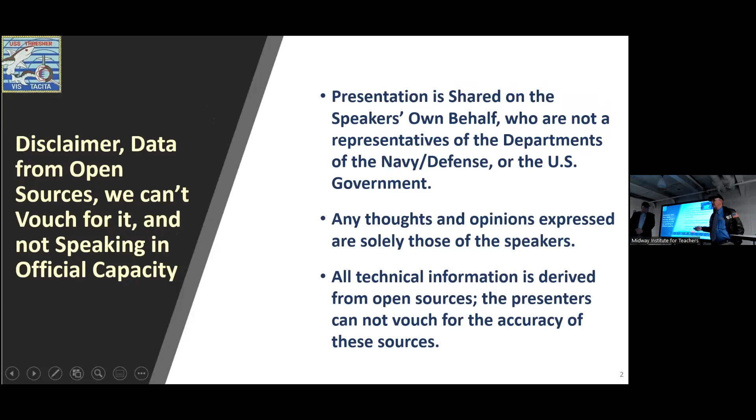We use standard criteria, we're not the government, some of the terms qualified people under submarines would use. ASW means 2 things: it can mean auxiliary seawater system, or it can mean anti-submarine warfare. Ship service motor generator is important.

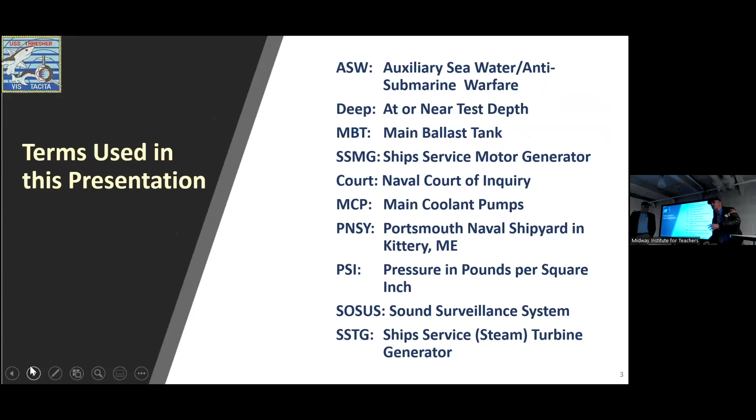It's rotating machinery, battery to AC power. And then down here, you've got a ship service turbine generator. The ship service motor generator runs main coolant pumps. They remove all the hot stuff out of the reactor core, move it into the steam generators so it can create steam. It was a very exciting class because it was quiet, it was fast.

It could go on a routine test. This is not a special test or anything.

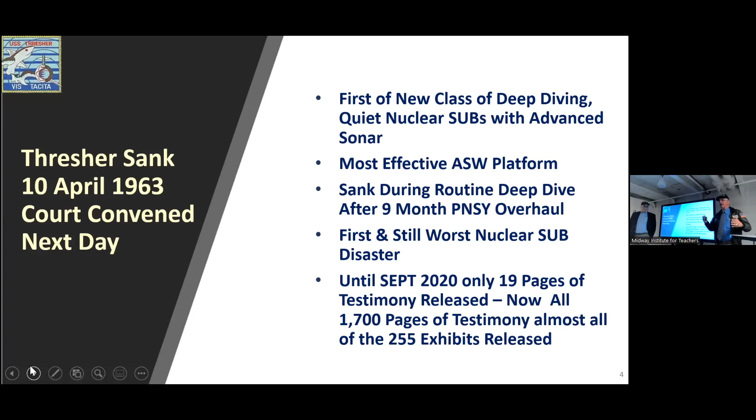It's not operational, it's a routine test dive to test the hull after an overhaul. Until I got involved, only 19 pages of testimony had been released. After getting stonewalled by the Navy, I finally decided to sue them. Now we've got maybe about 3,000 pages of information. I think the Navy did not give me whole blank pages of redaction. The group here can understand it because we're submariners, but folks who don't know submarines would not be able to understand it.

So I will definitely be challenging the redactions. No cover-ups, no smoking guns. And here's the key formula, right here: no one realized the danger of going almost doubling the test depth of the submarine.

And all of these things, procedures, mindset, all of that, no concept of what the real danger was. Also, the deep dive test was just not done right, it was very unsafe. Admiral Rickover, Director of Naval Propulsion, had a procedure that could have saved Thresher using emergency propulsion, and that was not approved for Thresher. Steve will talk a lot about crew training and officer experience.

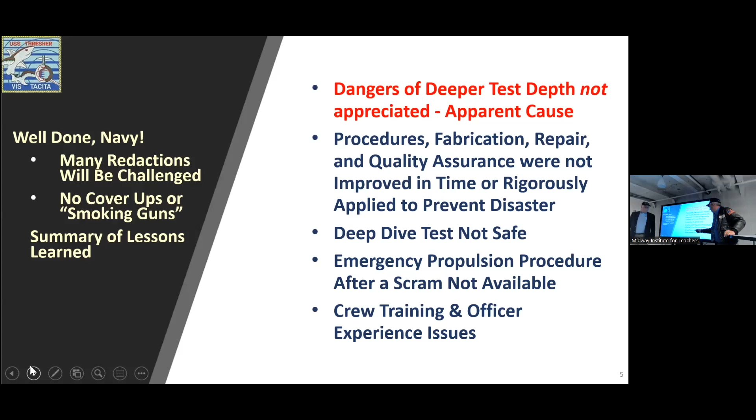Now everything below 800 feet operating is classified. Even Chopper, which we all know went to 1,000 feet, is in open literature. But if you show that to the Navy, they'll say that's classified. I mean, Thresher-class boats were gone a long time ago.

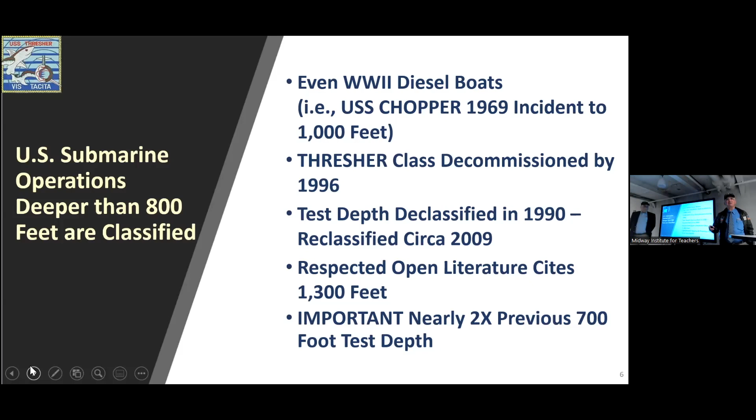In 1990, they declassified and released a book stating the test depth of Thresher as 1,300 feet. But they reclassified that again in 2009. Not sure what it is now, but respected literature, which we quote, not our own knowledge, says 1,300 feet. That's important because that's almost twice the test depth of previous submarines, which went from 700 feet to 1,300 feet.

This is a timeline, and like I was saying to a gentleman at lunch, you've got to take it in the context of Sputnik. The Soviet Union had put Sputnik into orbit. In the United States as a country, obviously DOD, Capitol Hill, everybody else, there was a lot of angst. So around the time that the ship's keel was laid and she was designed, you had a satellite orbiting.

3 years and 3 months later, she was commissioned, phenomenally fast. A year after that, she did explosive shock testing. A lot of you folks have heard about shock trials on the aircraft carrier Ford. That's a requirement for all new classes of ship.

After that, in 1962, she entered the shipyard where she was built for a post-shakedown availability. During that time frame, both the CO and the XO were transferred from the boat, and 3 months later, she commenced sea trials and was subsequently lost.

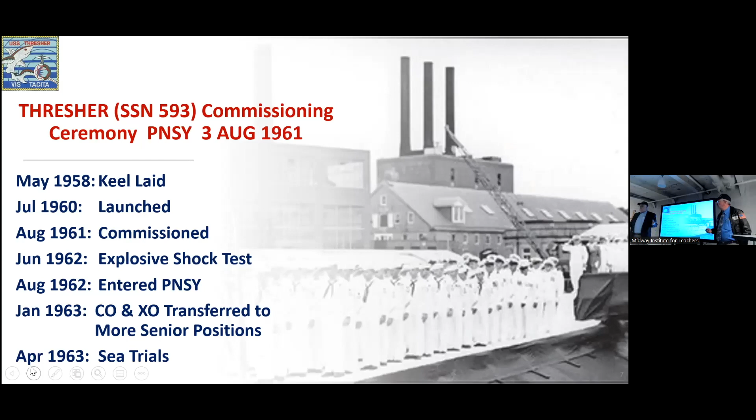Another thing to bear in mind, and keep this in the back of your mind, 6 months before Thresher was lost, we had the Cuban Missile Crisis. Many of us lived through that.

Okay, test depth, collapse depth, very important to understand. Test depth is the maximum submarine operating depth. It can go deeper, but you need special permission and special circumstances. It's also the depth to which you have to send a submarine to test the pressure hull. The only way you can test the pressure hull of the submarine and all the external cabling is to go to test depth, except for - no experts in here going to counter me?

You should - the Germans had pressure tanks for their submarines from World War II because they couldn't get deep enough in the Baltic to test them, but we don't. So collapse depth has a 1.5 safety factor. That means the calculated collapse depth, you're good to go - you're guaranteed to go to 1,950 feet.

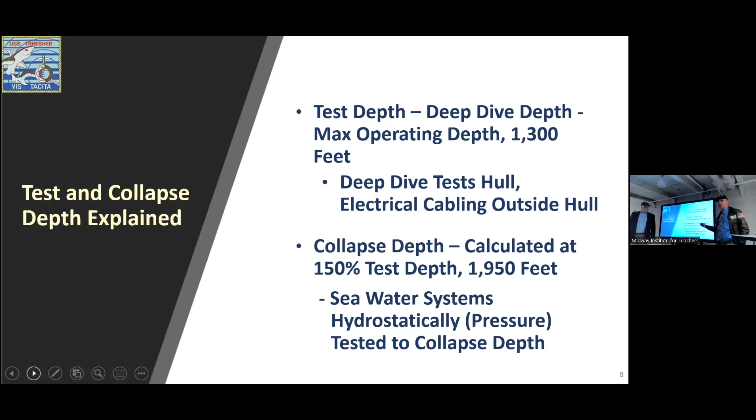All seawater systems in hard tanks subject to sea pressure on a submarine are tested to this collapse depth pressure, everything except for the pressure hull and external cabling, 1,950 feet.

Thresher was an improved Skipjack class in that she had the same S5W reactor, propulsion turbines and the like. She likewise had a teardrop shaped hull, the same type of sail, fair water planes. She was at the time designed to be, and proved to be, the most effective anti-submarine warfare platform in the world.

Let's talk about the key things that made her the best anti-submarine warfare platform in the world. First thing, here in the bow of the submarine. On previous submarines, they had a torpedo room up here with torpedo tubes sticking out.

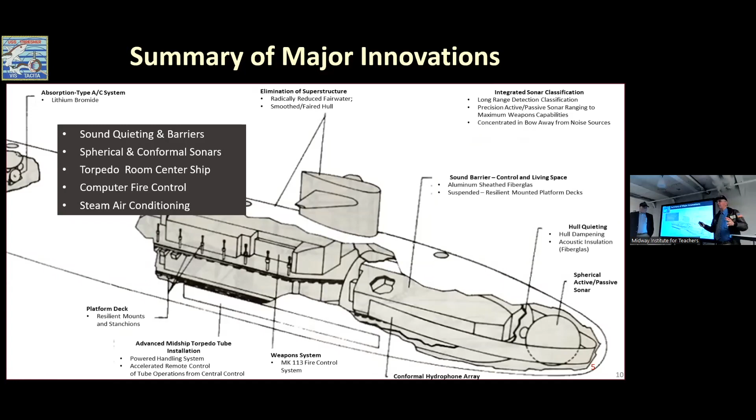Well, they wanted to put this huge spherical active passive sonar up there. No room. So they moved the torpedo room back to the center of the ship, and they had this large conformal array. Then to make it quiet for these, they sheathed the whole bow compartment in a sound barrier material. That, plus a lot of sound mounts, a lot of rafting and machinery - the whole propulsion machinery was on rafts and sound mounts.

This is an inboard profile of what Thresher looked like. I won't get into the compartments, you can read that. She had a sonar sphere that Jim was just talking about.

Basically the ballast tanks, the MBTs, were the blue tanks. They were wraparound tanks. If you were to slice the boat in half or in a section, she was a circular cross section. That dove the boat.

To get the boat to trim out and find equilibrium to hover in the water column, you had the red tanks, which were considered part of the variable ballast tanks. You had forward and aft trim that allowed you to bow up, bow down, and then you had the auxiliaries and the negative tank.

The water through these red tanks, the variable ballast tanks, was pumped in and out by the trim pump. And if you had water in the bilge or you wanted to get rid of the contents of sanitary tanks or waste oil, it was done with the drain pump. Both the drain pump and the trim pump were the same make and model - they had the same oomph. We'll get into that in a little bit.

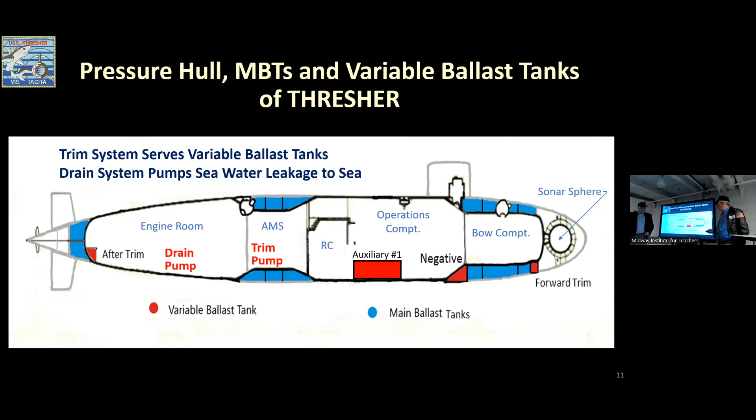The ballast tanks open on the bottom, vented on top, make you submerge.

In order to quiet the submarine and put these extra rafting and sound isolation mounts in, they had to make it bigger - longer and wider. And you can see, it got to be heavier. So they wanted to keep the same speed. Speed and depth, very important. So what they did is they looked for ways to reduce drag. They even ground down the welds in the ship to make it smooth.

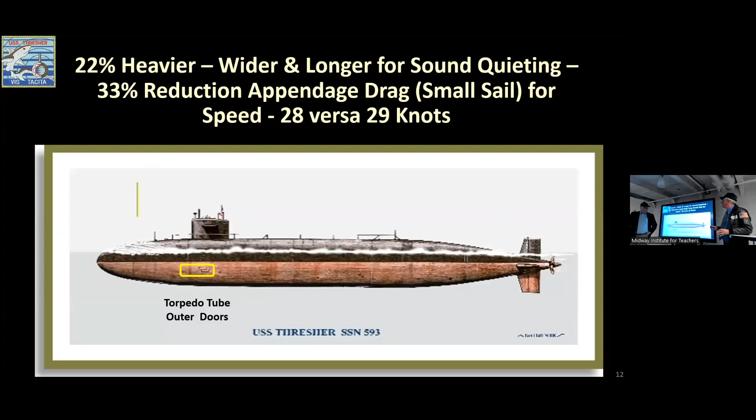It was there when I worked there, during the availability that Thresher was subsequently lost out of. Being the first of the class, they were doing some design adjustments. Not that the pressure hull had problems, but they were worried because this class boat and all the nukes tended to go to their maximum operating depth so frequently compared with the old diesel boats.

They ended up stiffening up flat plate bulkheads because they were getting worried about fatigue. They replaced major components like the trash ejector with new mass. They completely ripped out and redid the freshwater side of the main condenser system, including the pumps. They changed - a big job.

They changed what Thresher was built with, a synthetic hydraulic oil, which was a failure. They put it back to a petroleum-based hydraulic.

And the boat, just before she went into the availability, had explosive shock trial testing. What they did was they surveyed the boat and made up a work package of things that had to be fixed. The problem was, as the availability kept progressing, they found more and more things that weren't listed, and they had to keep fixing it. That occurred right up to a few weeks before the availability ended. The boat went to sea.

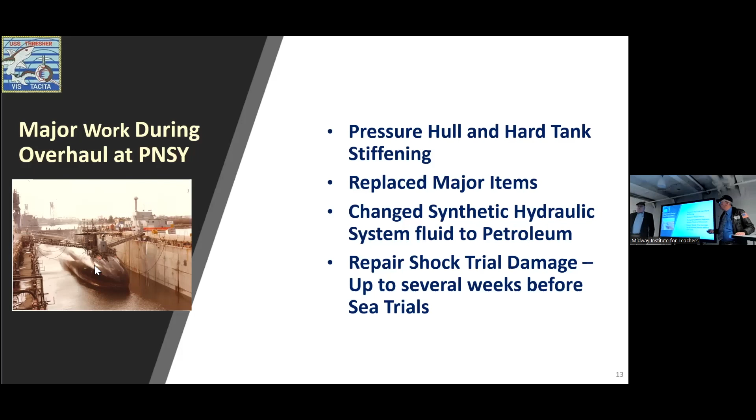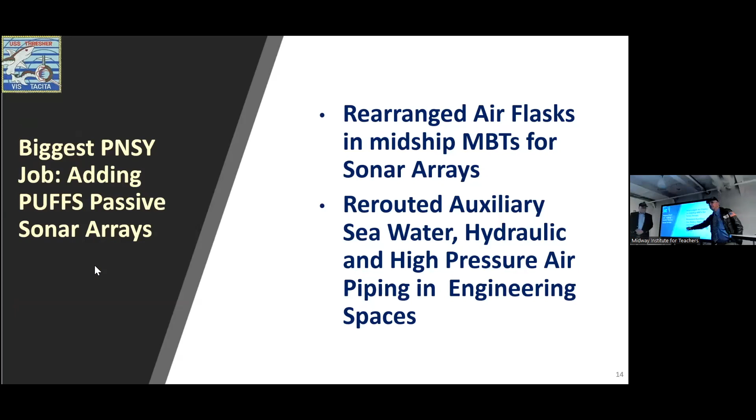The biggest job on Thresher was to put in a passive ranging system. I could go for hours on technique and SUBROC and all that kind of stuff. But in order to do that, they had to put these hydrophone arrays on the stern plane, into the horizontal stabilizers and the ballast tanks. And they rearranged a lot of piping and a lot of things. The arrangement of all this critical piping becomes important here later.

There were no survivors, obviously, because the submarine had sank. And so there were no electronic recordings, no magnetic tapes. The SOSUS, we'll go into SOSUS in more detail, but the acoustic signature of Thresher was recorded on paper grams.

The main source was underwater telephone, and the witnesses on the escort ship Skylark, and of course people that were involved with it. Now on the left, this is Skylark, a submarine rescue vessel. It escorts submarines out on sea trials. This is an underwater telephone that both Thresher and Skylark had.

This is not radio. How many people in here are talking underwater telephone? Good. So you know how bad it is. Not only do you get the kind of static stuff, you get the reverberations, you get sea life interfering with you, you get own ship's noise, very slow means of talking back and forth, and sometimes confusing.

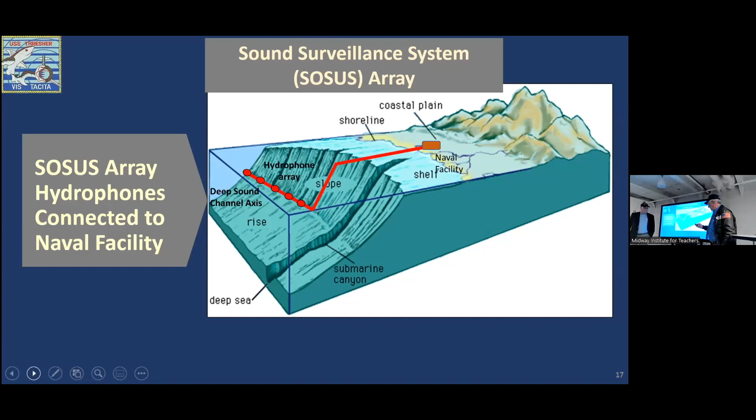This is SOSUS, a key element of this whole study. Here you've got a 40 hydrophone array, laid across a continental slope at the right depth to collect the best sound from submarines. It's cabled up to a naval facility. This cabling goes into all of these, it's processed and goes to these machines. Each of these machines forms a beam from this array, about 3 to 10 or 13 degrees each. Each one of these is rolling up electrosensitive paper. The stronger the signal, the darker the line. And if all these things line up, you've got yourself a noise source out there to evaluate.

Bruce Rule is important. Bruce Rule was a reserve lieutenant in charge of analysis for the SOSUS system for the whole Atlantic Basin. They picked him to analyze the Thresher SOSUS recordings and to testify before the Naval Inquiry. He's also the one that, thinking back on it, about 2009, said there were no SOSUS indications of flooding on Thresher. So there was no major flooding, no big pipe flooding. That water going out, hitting the hull, would have caused resonance and major lines on the Thresher recordings. So he analyzed, testified in court, and spent 42 years in the Office of Naval Intelligence.

Then in 2017, he called me up and said, 'Jim, I'm an old man, I need to tell this story, and the Navy won't tell it.' So he wrote a book, and he says lots of interesting things in that book. Most of it is confirmed by what the Navy has now released. So it would have been secret - the Navy didn't really touch it.

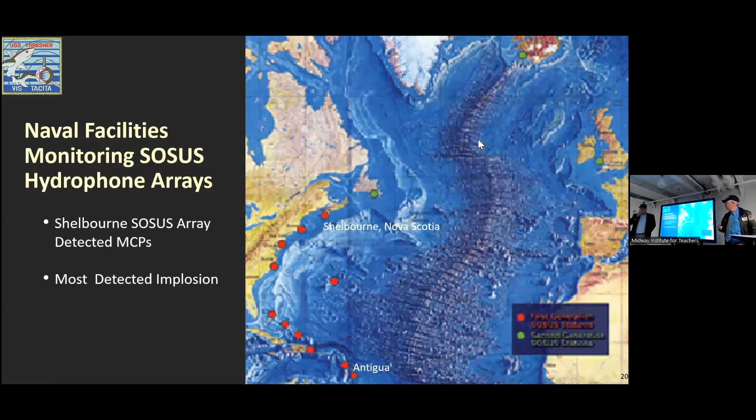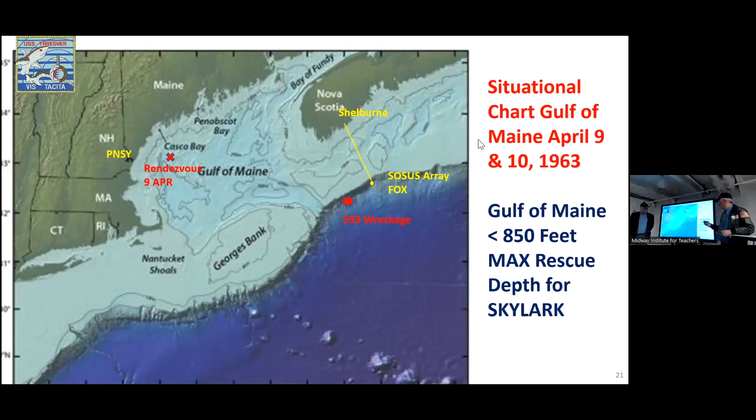Now, they got blade rate - you know the blade rate, I'll talk to you about it afterwards. But she came down the canyon, and the SOSUS array got some blade rate. But during the deep dive test, Thresher did not go above 12 knots, and that's kind of unusual. There was no machinery running except for the fast speed main coolant pumps. And this is very close - 30 nautical miles, 50 nautical miles is very, very close to a SOSUS array. And that's about the approximate orientation.

Okay, what we found based on the testimony was there were some issues with design, which we'll get into, quality assurance, which we'll get into, training and crew personnel turnover, and basically some of the design codes were antiquated for a boat that could dive this deep. But basically the Navy did what they knew.

Next slide. Okay, one of the things, for example, that was antiquated was there was a lot of runs of piping through the ship, and I mean a lot of runs, that saw full submergence pressure. So if they were at 1,300 feet, they saw 1,300 feet of pressure, even to the point of where you use water to flush the heads if you were doing it with about 600 psi.

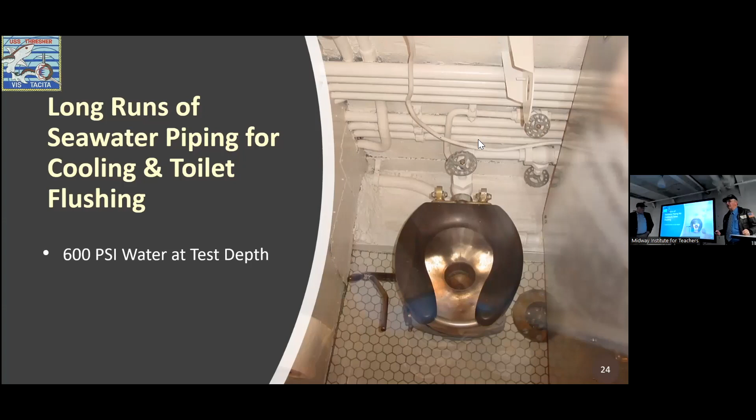Next slide. My research said they didn't flush the toilets much below about 300 feet. Otherwise, they got to be really excited.

Okay, Thresher during the PSA had a tremendous number of turnover, especially in the wardroom. The CO and the XO were relieved largely to move on to more senior positions. The new CO and XO came in, but they had no Thresher class experience at the time. That was just Thresher, Permit, and Plunger in service, and there was just no way to get that type of training. Bupers had a goal, and they were aware of the fact that they were poaching heavily on Thresher's wardroom officers. They wanted to make sure that Thresher had at least 6 nuclear submarine qualified officers in their wardroom. And in fact, Thresher had 7.

One was ashore due to an emergent family issue, at the hospital. So she was lost with 12 of her 13.

Basically, because there were so few people that were experienced, they had to load up on the XO, who was also designated by the CO as the sea trial test director, but he was also doing navigator, ops, and weapons because they had so few qualified people on board. In fact, some of these people had just reported to Thresher. It was the first time that they were on a submarine at all. They had come out of either specialty school or sub school. So she had, with respect to the officers, very, very thin experience levels.

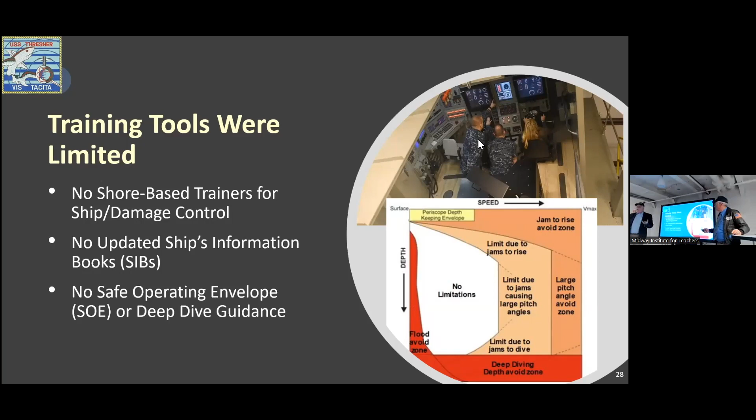They had several major failures of silver braze joints. Silver braze is a really neat thing. It's ten times cheaper, faster to do, you get it into tighter places, and it's just as good as a weld as long as it's done right. But a hydrostatic test will not prove that joint is going to hold. It's all about bonding. And they didn't get into the ultrasonic test routine until early 1962.

Remember, Thresher went into overhaul in the summer of '62. So they tested all the joints that were worked, that were taken apart and put back together again. But they only tested 145 of the joints that were not worked during that overhaul.

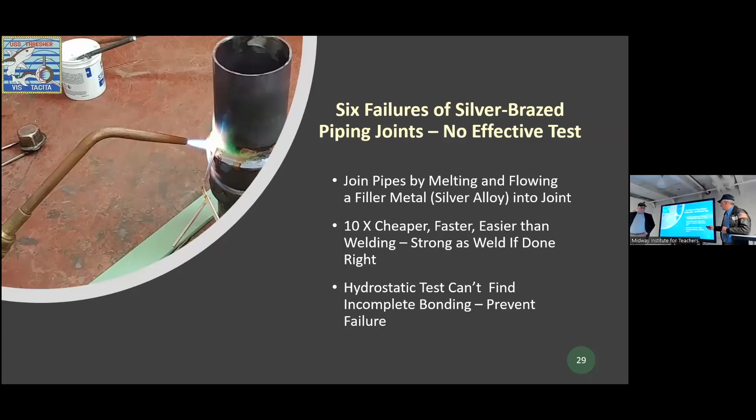And you just can't find a problem unless you ultrasonic test it.

And look at some of the numbers here. Look at the numbers here on the potential for the number of joints that could have failed the bonding test.

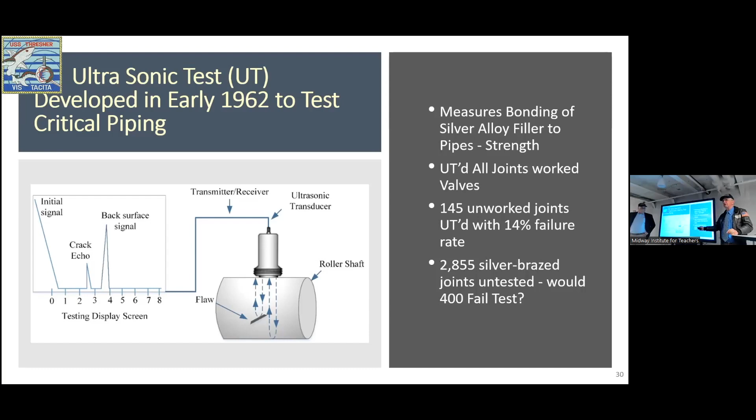And why didn't they do that? Because senior leadership, the top admirals in the Navy, thought if that silver braze joint, originally made, went through 40 deep dives, which Thresher did, went through a shock test, went back into overhaul, they checked to make sure the metal was right, did another hydrostatic test, it was good to go. That would not be prudent in today's thinking.

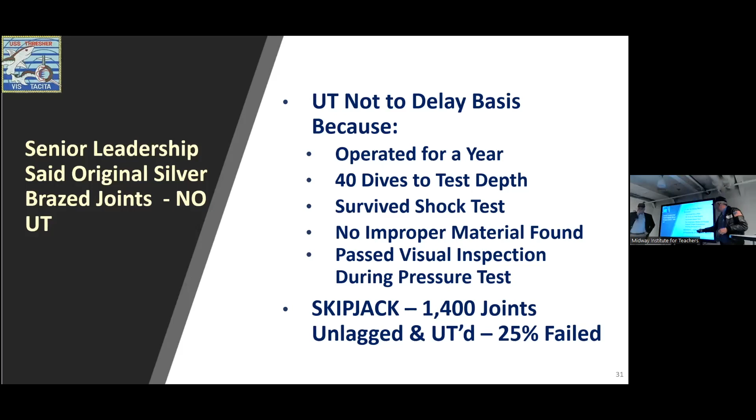Take a look at the Skipjack, the number of joints tested that failed the bonding test.

The submarine itself, Thresher, wasn't based upon any kind of casualty analysis back when she was designed.

The flooding control surface failure was not considered in the design until the summer of '62, a year after the boat was commissioned. When they started doing casualty studies, they realized that all of a sudden flooding was a real serious problem. When you went twice as deep, you flooded quite a bit faster.

They also learned that the air bank blow rate, in addition to the air bank volume they designed into Thresher, was insufficient. The blow rate was not specified in the design, and they used the same blow rate that they had designed into earlier submarine classes such as Nautilus, which dove half as deep.

They also found out, which they suspected, that a stern plane jam was a very serious thing. Obviously, you could dive below your test depth and go to collapse depth very quickly.

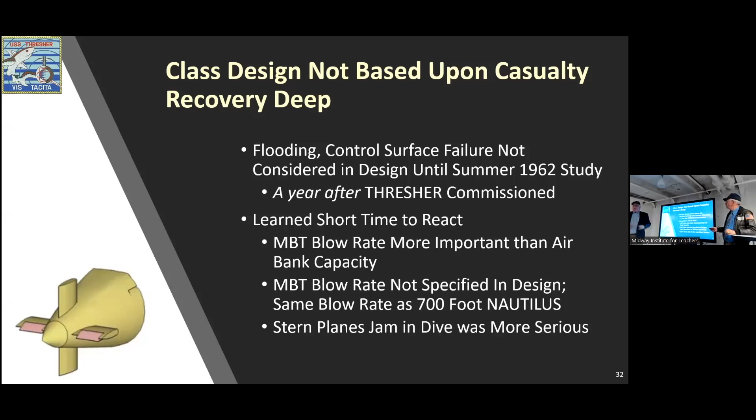On the blow rate system, basically because they fielded Thresher so fast, there were a lot of systems that were not reviewed for performance at the much deeper depth she operated at, one of which was the high pressure air blow system. They did not have time to do R&D and upgrade a lot of the components to a higher pressure.

So basically what they did was put 4,500 pounds of air into Thresher's air flasks, but immediately reduced it back down to 3,000 pounds. They sized the air banks to diesel submarine criteria, which was to surface twice from periscope depth, not test depth, shoot all your torpedoes, and keep enough air left in the banks to operate some of your pneumatic valves on board.

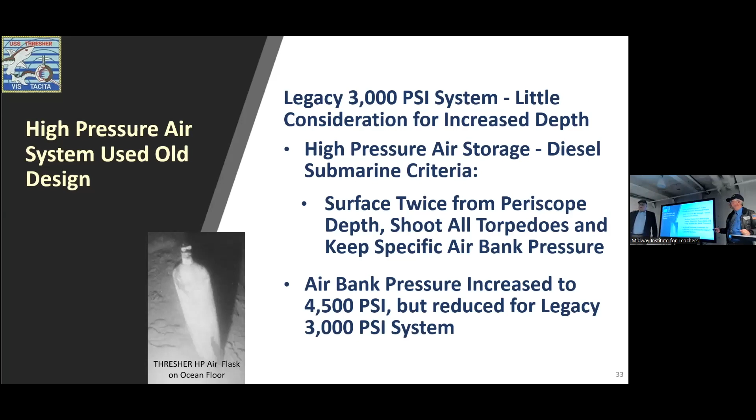By design, Thresher was not designed to surface from test depth unless it had nuclear propulsion. That means if you lost nuclear propulsion and you were heavy for some reason - flooding, bad trim, whatever - you had a reasonable chance of losing the ship.

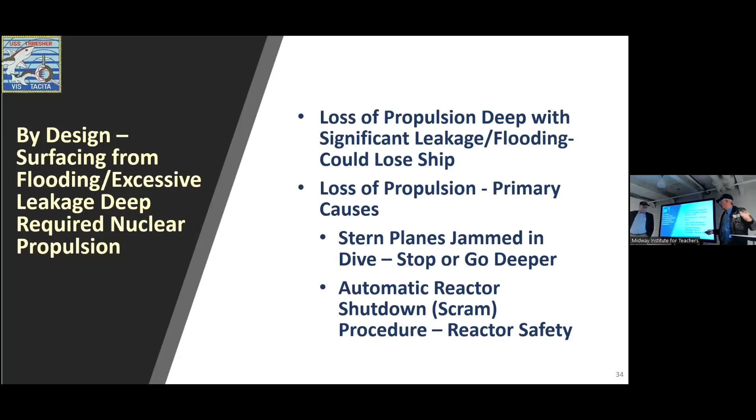So what could cause common causes back in those days of losing propulsion? A stern planes jam dive - if your stern planes jam on dive and you go forward, you go down, you have to stop. Or an automatic reactor scram, a safety.

The procedure back then was, if you had a reactor scram, you secured all steam supply to the engine - you shut the main steam stops. That meant you lost your ship service turbine generators, which means the only AC power you had was through your ship service motor generator.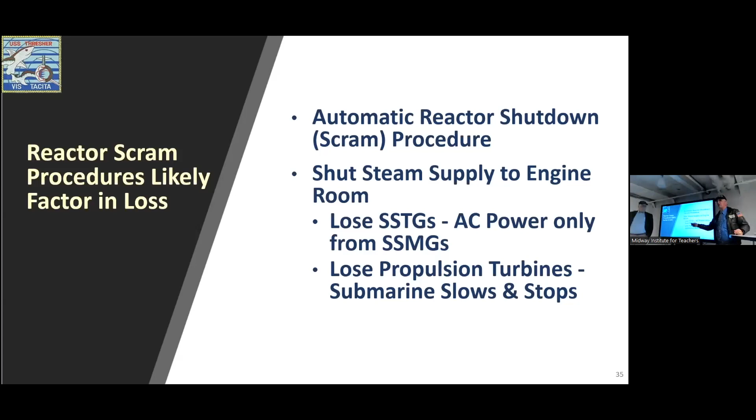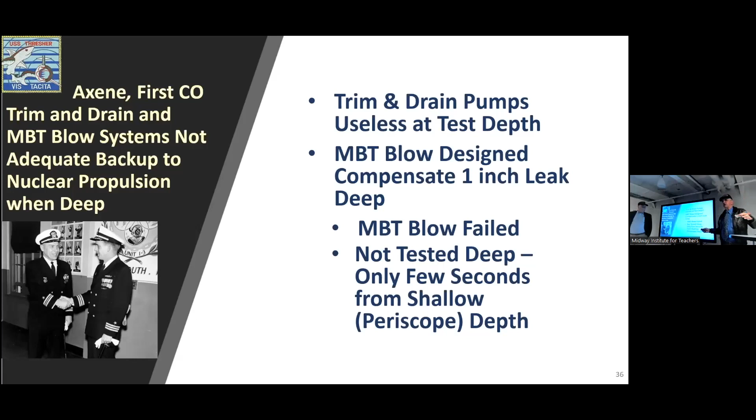Here's this Axene, Dean Axene, Admiral Axene, shaking hands with Wes Harvey, the second CO. He testified in court that the trim and drain pumps were useless. They used diesel boat criteria. Diesel boats didn't go to test depth very much, so they didn't worry about moving water out of the submarine at test depth. They only had a couple of gallons a minute flow rate at test depth. They had a blow system that, if it worked right, could compensate for about a 1-inch leak, but that blow system failed - Steve will go into that. They didn't even test the blow system at depth. They just used it to get from periscope depth up to the surface, and used low pressure blowers to fill the ballast tanks with air.

Okay, we got some new information from the Navy about the equipment and the main coolant pumps, and about being at fast speed with a rapid descent to test depth.

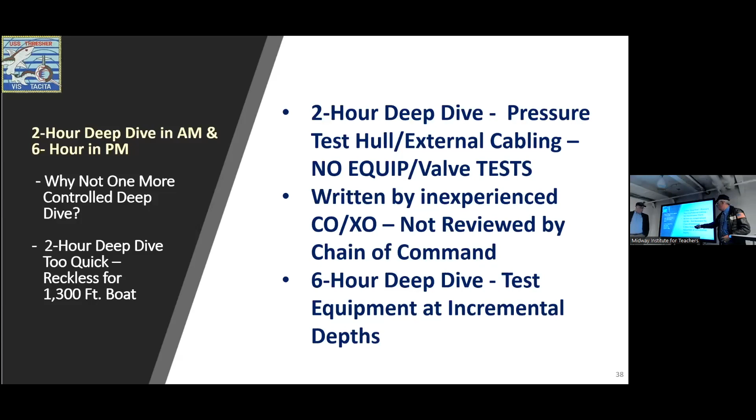Look at this, you've got 2 deep dives scheduled. First thing - why schedule 2? You've got a 2-hour deep dive in the morning, and a 6-hour, much more controlled deep dive in the afternoon. How many people in this room would like to just do the 6-hour deep dive rather than screw around with this short one, which is a very short hydrostatic test without all the safety precautions, without taking time to test equipment as you go deep. You're also going down at very slow increments in the 6-hour test.

Look at this 2-hour deep dive test. We reconstructed this, doing some guessing and looking at the SOSUS data for any submarine - that's a very quick time at depth. There's no time in there, and they didn't plan to test any equipment.

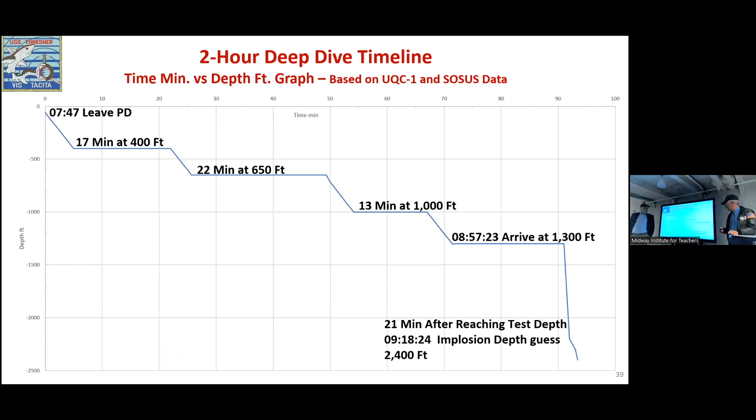Okay, there was no guidance on what you did during a deep dive test. The closest guidance we can find is prior to Thresher's first deep dive, with Admiral Rickover on board, Director of Naval Nuclear Propulsion. They all agreed that since the blow capacity was terrible, and the trim pump capacity was terrible, if you could rapidly accelerate up, maybe you'd get better flow rate and better blow rate if you got up a couple hundred feet. So leave main coolant pumps at fast to get that acceleration.

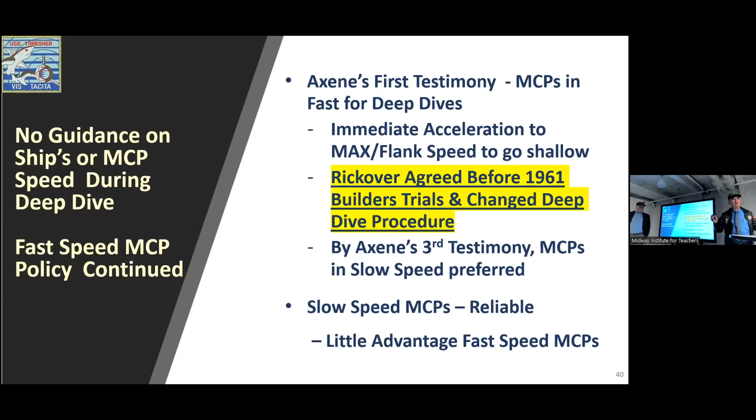Except by the time Axene got to his third testimony, everything changed. Now, no - fast speed main coolant pumps are no good, slow speed main coolant pumps are better. We'll go into that detail later. Slow speed main coolant pumps are just a lot more reliable.

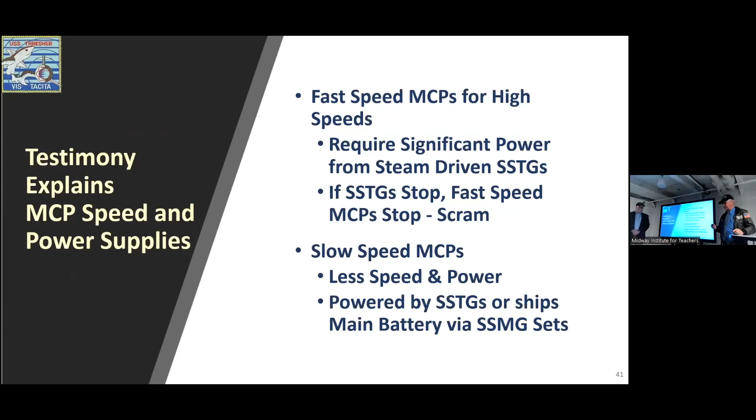Okay, if you want to go fast on a nuclear submarine, you have to have main coolant pumps at fast, or you have to have increased flow through the reactor. But that requires a lot of power, and that power can only be provided by the ship service turbine generators, which require reactor steam. Slow speed main coolant pumps do not - they can be powered off the battery by the ship service motor generators. They found that fast speed pump acceleration was just not good; the reliability of the slow speed pump was much better. So these recommendations came in for deep dive tests, and they kind of got into Naval Reactor's business by saying main coolant pumps at slow speed should be used for deep dive tests.

Okay, main coolant pump stopped at 0911. Causes a scram. It's called a no-flow scram. It's no good having no flow through a reactor when the reactor is producing decay heat - so you've got to scram the reactor, shut it down. And there is no effective backup for loss of propulsion when you're deep if you're heavy.

Okay, here's some of the timeline. Bruce's book talks about 2 minutes of slow variation of main coolant pump speed, which means the turbine generators were slowly varying between 0909 and 0911. To me, this is a possible symptom of interruption of cooling water flow through the main condensers, which would change the speed of the turbine generators. That means they've got some kind of problem going on - leak isolation, something spraying, some water is spraying. We didn't find that in our first couple passes through the testimony, and we finally found it because it was very heavily redacted, but that confirms what Bruce Rule said in his book.

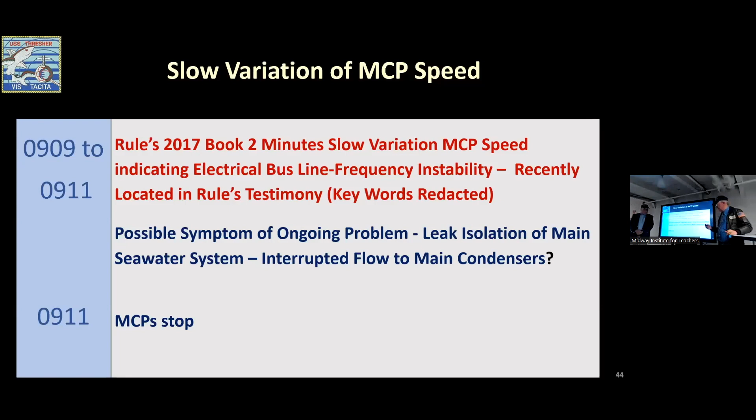Now, right after 0909, when we say the slow variations, some other things start happening. Thresher changes course to the same course as the escort vessel Skylark. Why do you do that? It reduces the chance of a collision with your escort vessel if you're coming up on the same course, right?

And they started the main ballast tank blow, but that blow only lasted 90 seconds. Opinion: they were sinking, they were in trouble, and the CO expected that blow to save the submarine. And again, main coolant pump stopped at 0911.

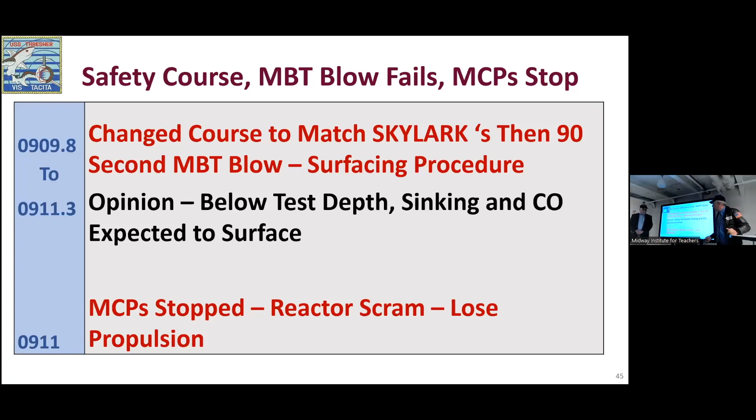Very interesting message at 0913: experiencing minor difficulties. We'll talk about that. That's kind of a crazy statement to make. Have positive up angle, we hope so. That's what submarines are supposed to do when they're in trouble and they're deep.

Attempting to blow, well, the 90-second blow stopped. I wouldn't stop blowing, I'd keep blowing until I was on the surface. Then right after that, we get another 30-second blow that stops.

0916, exceeding test depth. We think that's collapse depth, and we'll show you that in the next slide that Fred produced. And they heard 900 north - not sure of that, but the board really thought they heard that. Does that mean 900 feet below test depth? That kind of makes sense.

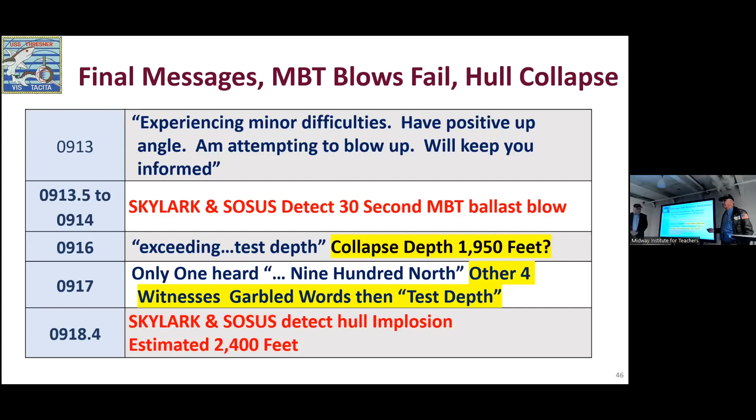And then we have implosion at about 2,400 feet. We just did a paper on this for the submarine review, and 2,400 feet looks pretty good for the actual collapse depth. 22,000 tons of TNT equivalent.

The Lofargram - we talked about the Lofargrams, or what the SOSUS produces, the paper strip. Rule has testimony in there, he talks about this, Exhibit 52. It's a Lofargram. He talks about that as showing all this very important material.

Well, this Lofargram the Navy just gave us back in November only shows the implosion. Every hydrophone, every SOSUS hydrophone in the entire Atlantic Basin heard that explosion. So the president of the court told him to mark an A on that exhibit. There is no A on that exhibit. And there's heavy surface contact, and we'll show you that next.

Okay, this is the Lofargram the Navy gave us, with some redactions. It's beam 19, and that's not right - we'll show you that in the next slide. This chart is moving at 13 inches an hour, 0 to 150 hertz down here.

All these lines, Bruce said, and it makes sense - that's not a main coolant pump line. That's a bunch of surface ship noise coming through with all kinds of interference. Bruce said when he briefed that slide, that graph, on April 18th, 1963, he was very, very clear. You could see the main ballast tank blows, you could see the main coolant pump line coming down.

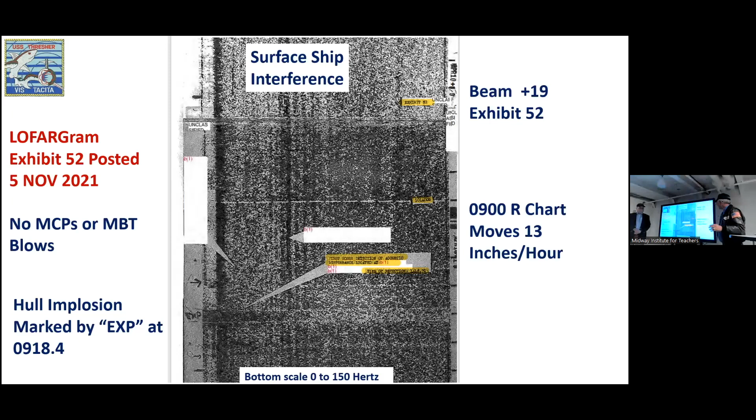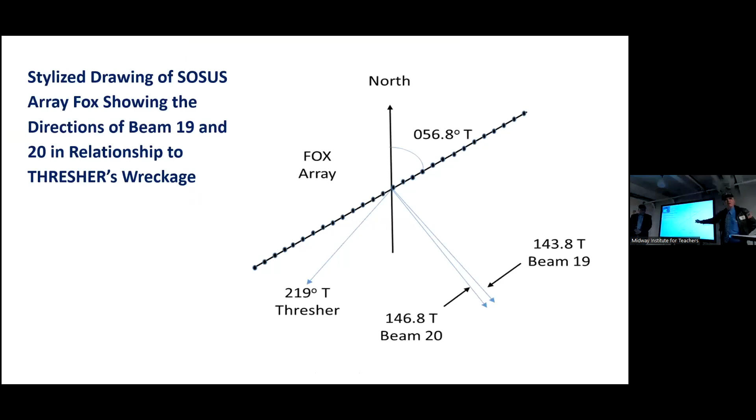So you'd expect - here's a better representation. Here's this beam 19 looking out to sea, picking up merchant traffic going up and down the coast. And here's this end-fire beam looking down here towards where the Thresher was - you can see it's not very precise, that's just wreckage, that's all approximate. We have the lat-long of the rendezvous point, but certainly not the Thresher. So that doesn't make sense.

Okay, depth versus time. Fred assumed that Thresher was 15,000 pounds heavy - a lot of talk in the nuclear submarines, you don't need to compensate for going deep. A 594-class submarine gets 1,000 pounds heavier for every 100 feet it goes deep, because the hull compresses.

So if they didn't do that, Fred said, well, at 0911 the ship stops and starts to sink. Well, look at this - at 0913 you're down here. Is that a minor difficulty? Not to me, as a former submarine captain. I think you're in real trouble. I wouldn't call that minor.

Then about 0916, passing test depth - well, unless they went down really, really fast, they're passing collapse depth, 1,950 feet. And then you have the 900 north, and that about works on the timeline. And he did - what's your calculation on what do you call this, Fred, this line here?

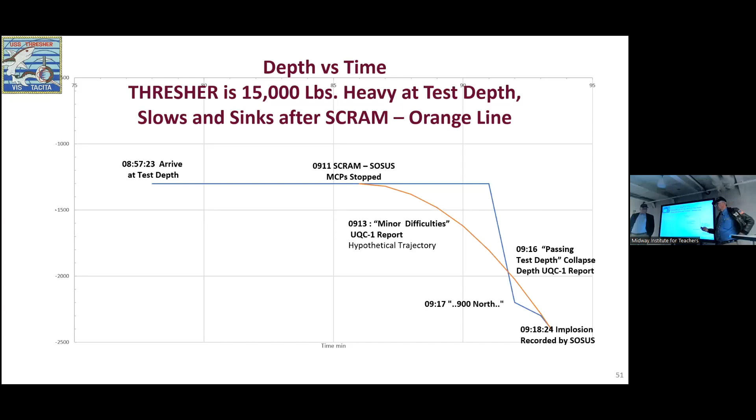That line is based on meeting the SOSUS and Skylark UQC communications. It's a trajectory calculated through the depth that the Thresher was passing. Thank you, Doctor.

So why didn't the ballast tank blow get the ship to the surface? By testimony, it should have. I'll get into that in a minute, but that was the key question the Court of Inquiry wanted to know.

Tinosa, which you saw in dry dock under construction at the time, had a functional main ballast tank blow system. So they ordered a pier side blow of Tinosa's system, something never done before, and there was a lot of concern about whether it would blow out the ballast tank shell plating. So they approached it incrementally.

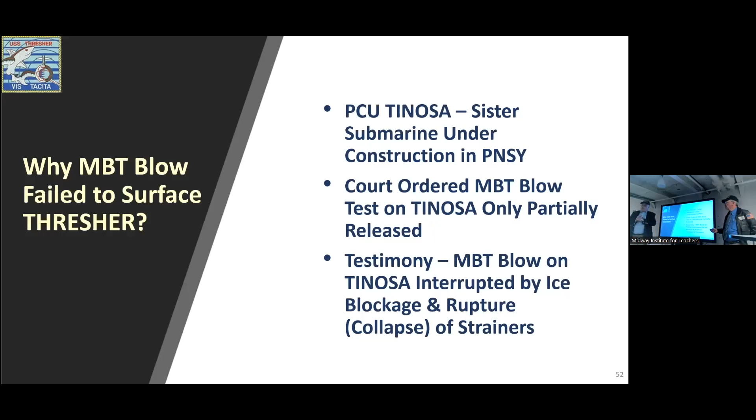When they finally did the full 4,500 pound blow, it would blow and stop, then blow and stop again, not performing as expected. So they broke open the mechanical joints to figure out what was going on, and found it was blocked by both ice and a conical strainer that had collapsed onto an orifice plate, plugging it, then icing over and preventing it from working properly.

You can see, in this case off of Tinosa, the tip of the conical strainer and how it got all mashed down. It sat on top of this orifice plate, and the mashing of the strainer into the orifice plate effectively blocked it, then it was sealed by a buildup of ice on top because Thresher had moist air.

By testimony, the ship should have been able to deballast about 10% of its ballast tanks at test depth, even though it wasn't designed to do that. I calculated that would deballast the tanks by about 120,000 pounds of water—should have been more than enough to make the boat positively buoyant and then some to get it to the surface, but it didn't.

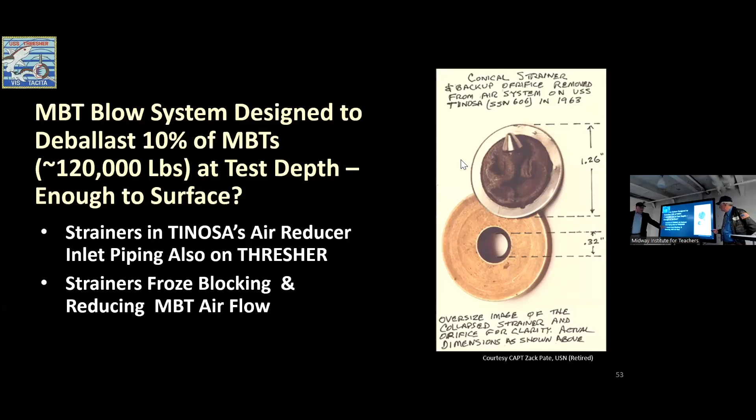What we found was these strainers were on the inlet side of the 4,500 to 3,000 pound air reducers—remember, they reduced the pressure down to 3,000 pounds. The strainers ended up collapsing and freezing in place, restricting airflow. Testimony indicated Thresher went to sea with those strainers still installed, even though the shipyard had directions to remove them. We know this because the pipe shop was directed by the ship to break those mechanical joints open to prove to crew members that they were still installed.

As Jim said, the new CO had nothing but problems with particulate damage in the high pressure air system, contamination tearing up his reducers and causing leaks. He didn't want to go to sea without those conical strainers and orifice plates installed, not knowing what it was going to do to him. So it wasn't an illogical reason for him to want to retain them—unfortunately, it had dire consequences.

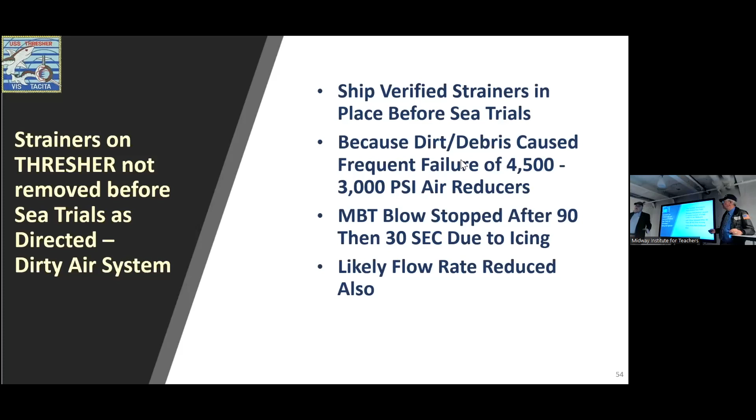As a result, we got a 90-second blow from Thresher initially. It looks like they tried again a couple of minutes later but only got a 30-second blow. It was a very ineffective blow—they didn't move enough water or air into the ballast tanks to displace enough water to get the boat up.

Now comes the fun stuff—nuclear propulsion, Admiral Rickover, yay! I was just interviewed by him. We're talking about how he defended his program and about his emergency procedure.

Rickover goes into court—he wasn't supposed to testify, but he got kind of forced into it, and they did it publicly. The judge of the court says, 'Well, Admiral Rickover, of course the reactor has nothing to do with this, right?' And he says, 'Oh, yes, of course.' Then he pulls out his prepared speech and says, 'Oh yeah, well, we'll go later on—maybe the reactor procedures did have something to do with this.' But anyway, he covered that.

The next thing was, we all know this guy was created by radiation, right? Giant ants, Godzilla, all created by radiation—the public had seen movies about this for the last five or six years. So the next answer was pretty good: no, there was no radioactive contamination. And that's good, because they did bottom samples, air samples, and water samples, and there was no radiation.

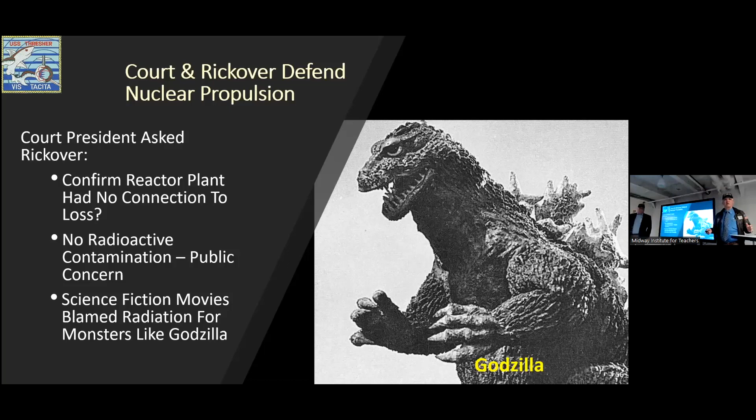So what you're seeing here is protection of the nuclear propulsion program. We had 28 nuclear submarines at sea, with 36 more either bought or being built. The only way we could keep the Russians from nuking us, in my opinion, was by deploying nuclear submarines off their coast. So nuclear submarines were very important.

Okay, here's Rickover's description of his nuclear emergency propulsion procedure. When the reactor shuts down, it does not stop producing heat. There's a decay heat factor up to about 10% of what it was producing before the shutdown.

If you read this real quick, he admits here that if they had kept the main steam stops open and used that decay heat, residual heat, they could have got to the surface.

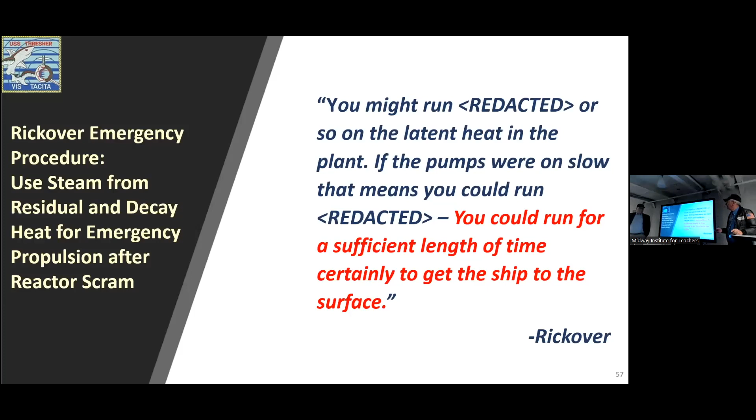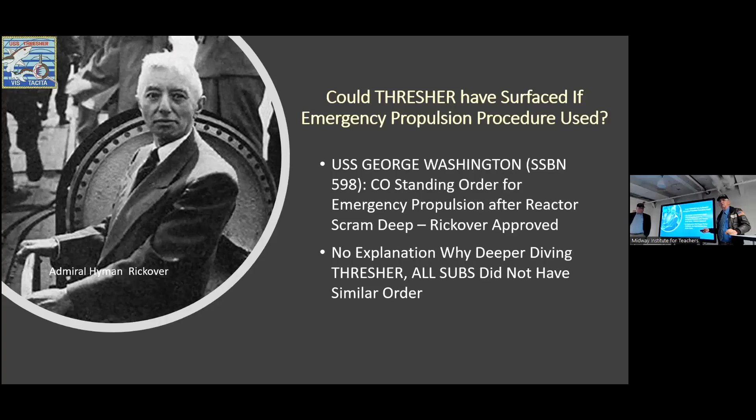Nowhere in the testimony, none of the papers we've asked for so far, have shown an explanation of why Thresher and the rest of the fleet did not have this procedure. It was a well-known procedure because naval reactors had gone out and practiced it on submarines, and everybody knew that - remember, it was a very small community back in those days. So everyone knew this procedure existed, and we don't know why it wasn't used. This information came off of a friend of mine who was a squadron commander and served on George Washington as a junior officer.

Rickover did do some things to speed up the recovery. If you keep steam in the engine room and don't shut the steam stops, it's easier to recover, it's faster to recover because you don't have to warm things up. And he mentioned there's a faster emergency recovery.

Rickover was in big trouble because he was in battle with the submarine diesel boat mafia, the diesel boats forever mafia. He needed to prevent his program from being damaged. He was replacing diesel electric submarines that just 18 years before were great heroes in winning the war against Japan. And many of those officers, lieutenant commanders who were academically qualified, were being rejected by Rickover.

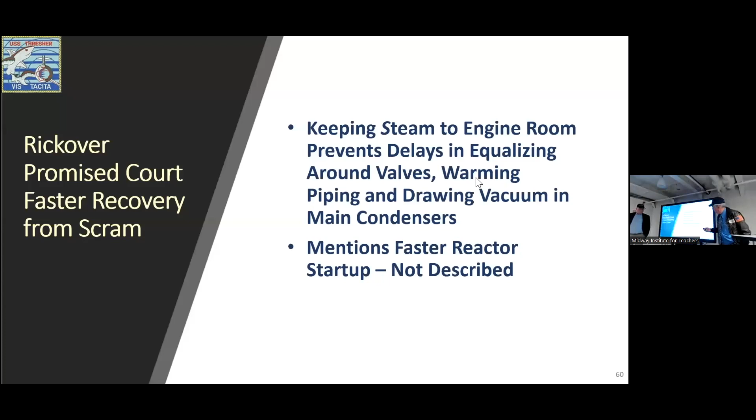And why was that? Because what caused them to win World War II - they were brave, daring, they didn't follow orders, they didn't follow directions, right? They drove their machinery into the ground. Lucky Fluckey put a shore party ashore and blew up a train. Rickover knew if he had a major reactor accident, he was going to hurt his program, and he did not want a guy like Lucky Fluckey running around as his CO of Barb operating his reactor.

Now remember, Dean Axene, the first commanding officer, carries a World War II patrol pin and a Bronze Star with a combat V.

And then we have - what I missed here - Smedberg was the chief of naval personnel. He said to the court, 'I've given you a big list of people who are academically qualified, they're really smart guys. But it's your prerogative, Admiral. You have reactor safety in mind. I will stay out of that.'

Not so Red Ramage. Why did Red Ramage take on Rickover? This is his description of the nuclear trained officers getting ready to be XOs - not very flattering. Well, why could Red Ramage do that? That little blue ribbon up there is the Medal of Honor. So he could outgun Rickover, even though Rickover had Congress in his back pocket and all that kind of stuff. So he was not very kind to Rickover.

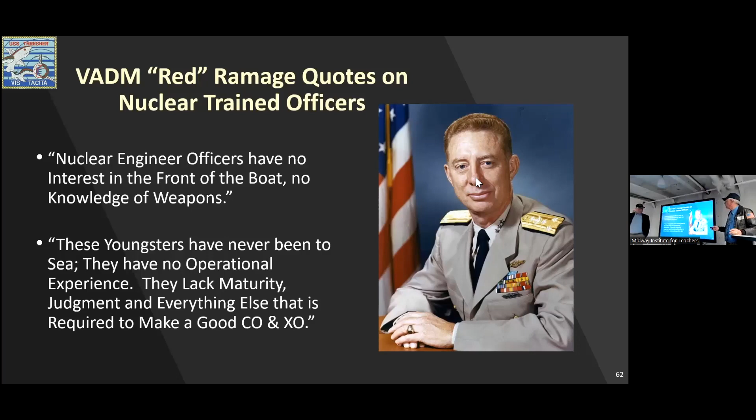Rickover tried to - I know we're at the end, boss. Yeah, we're not giving you the signal, so... okay, yeah.

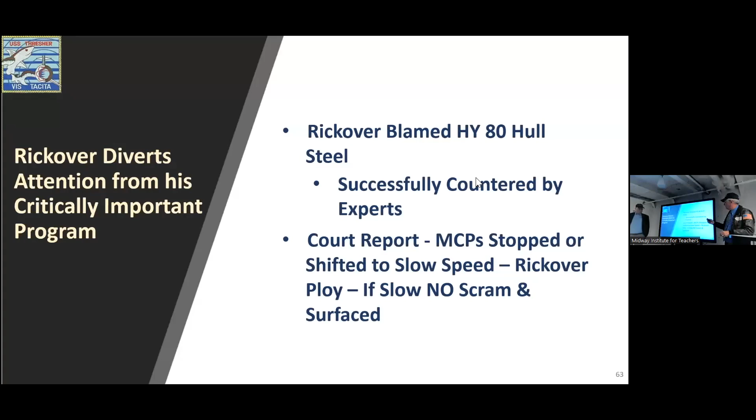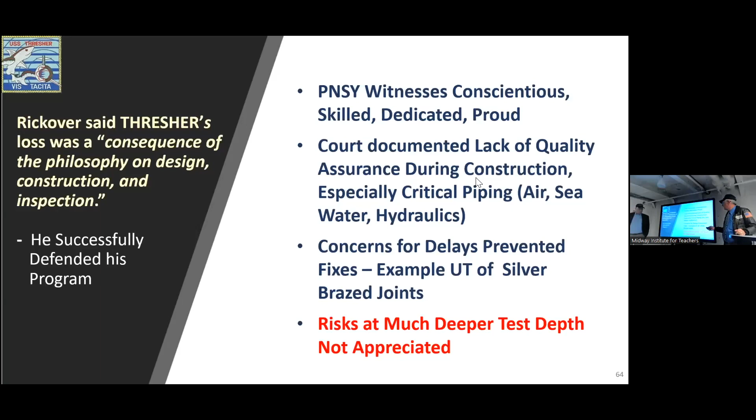Wrap up: Rickover tried to blame other people, it didn't work. And these are our findings at the end - Rickover's comment is correct, the Portsmouth Naval Shipyard guys were very conscientious during the testimony, very studious. They worked very hard, but they didn't have the procedures in line to do that, and there were a lot of concerns for delay. This is the result.

Basically, these are the 129 guys that were lost on Thresher, both military and civilian. There were a number of civilian riders from the shipyard and some of the contractors on board. What came out of Thresher was a program called the Submarine Safety Program, known as SubSafe. And basically, the SubSafe program is their legacy - it attempts to fix some of the shortfalls in design, fabrication, and quality assurance that we touched on.